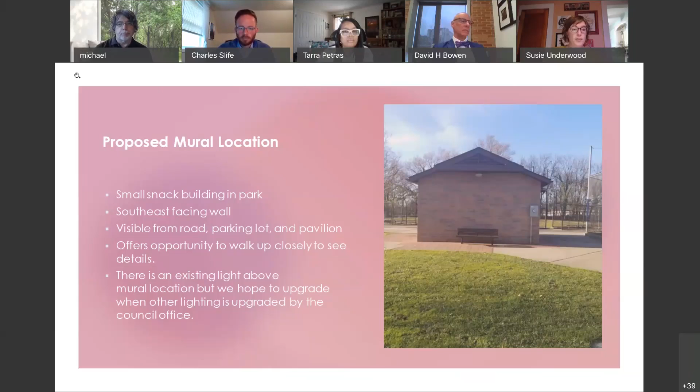You can see it when you drive by, and it also faces the rest of the park. So it's really the perfect location to see it from almost any direction that you would be in the park or around the park. You can progress the slide.

So the theme is celebration. The idea is that we wanted to really celebrate all the different cultural heritage of the neighborhood, and through the theme of celebration, how do different people celebrate? How do different cultures celebrate? And we got a lot of answers from the neighborhood for that.

And so the content for the middle of the mural is from the answers we got from community members, from residents around the different cultural celebrations.

And so the mural is actually called Our Neighborhood Celebrates, Nuestro Barrio Celebra. That's Angelica's name for it. And I think Celebramos will probably be what we call the celebration that we're hoping to have in June if we can get a permit, but sometime this summer for the community.

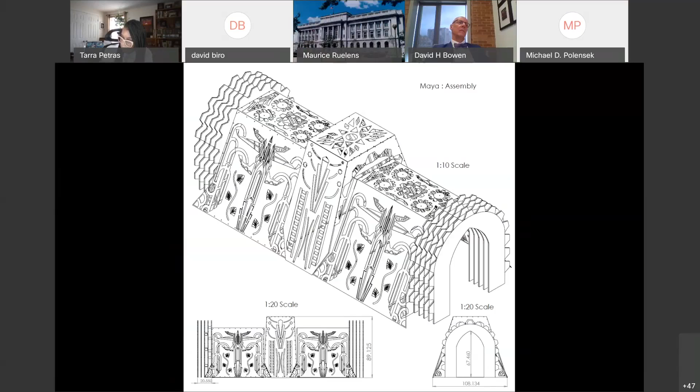Safety is a key focus here. Before we put this out on public display, we would add additional steel members to bring additional strength and raise the safety factor.

It's painted with DuPont Centari automotive finish — took about 3 gallons of actual car paint to paint it. The installation weighs about 2,500 to 3,000 pounds and will be temporarily mounted into the ground with stakes, so there's no fear of it blowing away.

Next slide, please. There's a top-down view with measurements in inches. The theme of this installation is a conglomeration, a collision between Art Deco and industrial design, with a bit of a Mayan religious, temple-like feel. That's mostly because Cleveland is very industrial in nature, with a lot of Art Deco, Roaring '20s design in and around the city — it's the collision between the two.

If we could go back to the previous slide, and then to the key shot rendering — what you see here is it rendered as if up on the hill at Carnegie and Ontario. This is KeyShot, a hyper-realistic rendering program that I use for all my design work. It's really handy for visualizing what an installation would look like at places around the city, or wherever I'd like to place them.

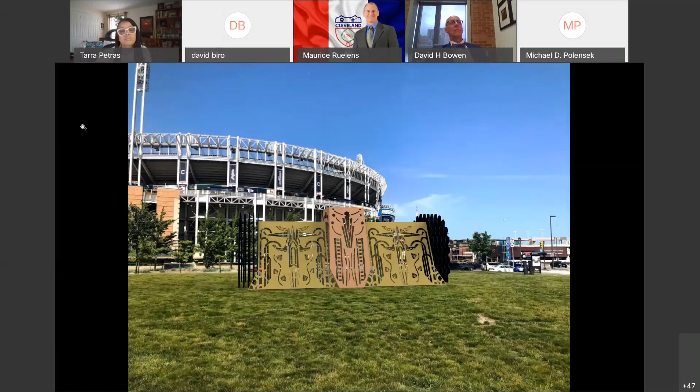And that's what it would look like from the front if you're standing in front of it. The entrances and exits actually have a decorative painting pattern on it that my friend did. It's not rendered here in KeyShot; she did it post design. And you could see what it will look like sitting up on the hill.

And this is at the location of Carnegie and Ontario, obviously. So, next slide.

It's really beautiful. Kirtland Park could serve as a great location for a gallery of large-scale public art, in my opinion. This pad here is really nice and expansive. There's actually an electrical box hookup next to it, but the electrical is missing — the city must have taken it out at some point. Can we go to the next slide, please?

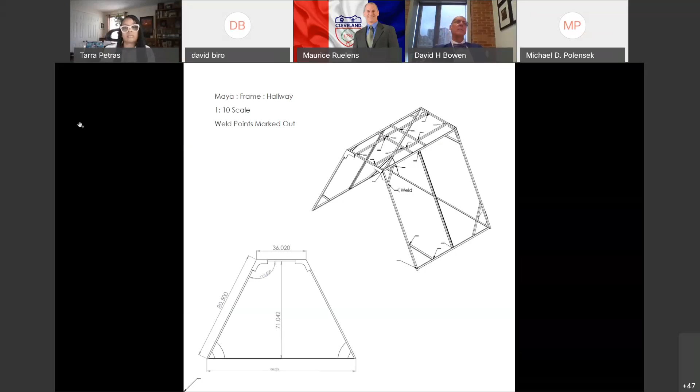I believe that people do stop and check out public art when they see something new, whether it's sitting at the corner of Carnegie and Ontario, or at a public park or an intersection somewhere around Cleveland. I believe people will stop.

It was talked about yesterday in design review. What I've seen with my public art installations is that people do stop to inquire what the heck is going on, what is this, what's it all about, what does it entail. It's typically not stuff you see in Cleveland, in my opinion. So it's with great gratitude to be able to bring a project like this and put it on display on public property.

Due to the nature of it, Maya can be orientated into a different direction on the pad. It probably can't be situated the other way, but it can be put at an angle. And then there would, once again, be solar lights around the installation pointing in.

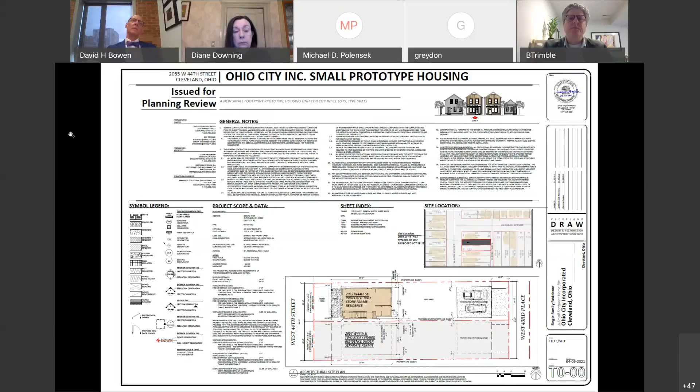We show that in relation to the neighboring houses to the north and the south. The north and south houses to our proposed lots are a foot or less than a foot away from the property line, which is pretty typical of this neighborhood and this block area.

If you wouldn't mind advancing the next slide, please. These are context photos showing the great mix of old and new infill houses on the street. We have mostly gable front, 1.5-story and 2-story houses, similar to what we're proposing, in relative closeness to one another.

Where there isn't a house, there was some previous lot split or a former house that has been demoed and is awaiting new construction. But the tightness, the closeness to the street, is prevalent not only on West 44th, but on Orchard and the street behind us. If you wouldn't mind advancing to the next slide, please.

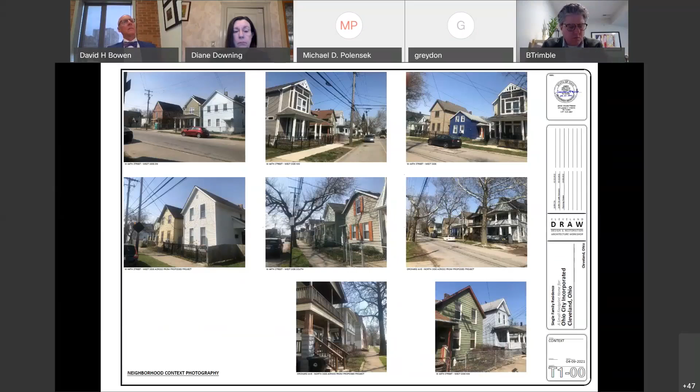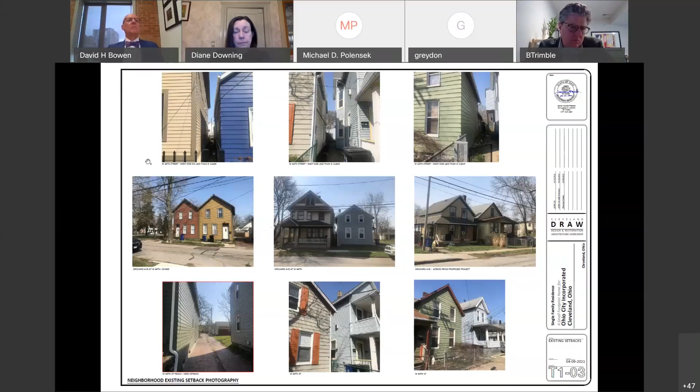The next 2 slides are just a quick excerpt from the protracted CD set, showing that we are really making small, affordable homes appropriate to the neighborhood. We're really trying to get new housing into this neighborhood.

You're fading in and out. We can't hear you, I'm sorry. I'm actually in the car on a road trip.

Just to show that these are affordable houses that we're really trying to make market rate at a price point that most people can afford. So 2-bedroom, 1.5 bath, but with good open spaces that have really been pushed to the 17-foot limit to maintain marketability, with some projections to 18 feet. And it's those projections of the stair to create the space upstairs that limits us down to 3 feet. Otherwise, we would be 5 feet, which we are at the street and the rear of the property.

And the last slide that you see is the front elevation that really shows the character of the new construction. For this, we've done several designs that we've worked through with the city and review committees, but this one seemed to fit the best with the context of the neighborhood. So that is what we would like to present to the commission, and I will turn it back to Ben for any further comments or questions.

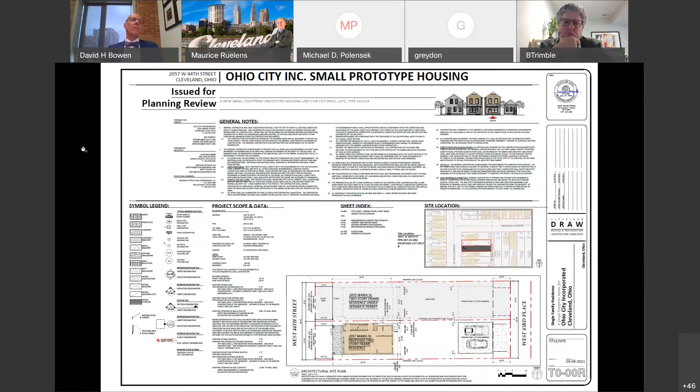Thank you. Commission members? I just want to say I appreciate your thoroughness. This helps define what you're trying to achieve. I do have a question: you're here for a lot split, I get it. Once that's done, you have to go then ask for permission for variances. So I need to understand what we're approving and what it means as you guys move forward.

Go ahead, Ben. So yes, we have already had this design approved by the Housing Design Review Committee internally at the city, not only because it's a land bank lot being provided to us, but also to approve the design. So after this, we would proceed to a variance. I don't believe that under 4 units proceeds to the commission, but maybe one of the planners could correct me. So I believe after this, we would proceed to variance and then to building review.

It would go to BZA, correct? Thank you, that's correct. I just have a procedural question, and again maybe this is food for thought. So you've gone through design, you're asking for a lot split, then you proceed for variances based upon setbacks, etc. What if they're not approved and they ask you to change your design? Seems like the working drawings are done. I'm just trying to understand how we got this far, and now you're asking. Hopefully you're crossing your fingers.

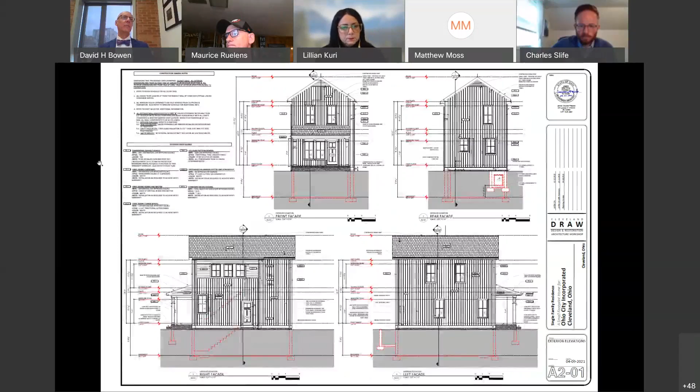Michael, call the roll, please. Bowen, yes. Downing, yes. Fluker, yes. Kuri, yes. Paul, yes. Slife, yes. Motion carries. Good luck, Ben. Thank you all very much. Thank you.

The next item is lot consolidation, lot split for permanent parcel numbers 004-01-038, 037, 066, and 067, located at 2041 through 2035 West 20th Street, and 2060 West 20th Place. Who's here for this?

Hi, this is Haley Novak from Horton Harbor. Can you all hear me all right? Yes, loud and clear. Okay, great. Thank you, Mr. Chair and members and staff.

As you mentioned, this lot split would involve quite a few parcels. We have some existing site images here. The parcels are located along West 20th Place, which is accessed off of Smith Court and is just to the east of West 20th Street.

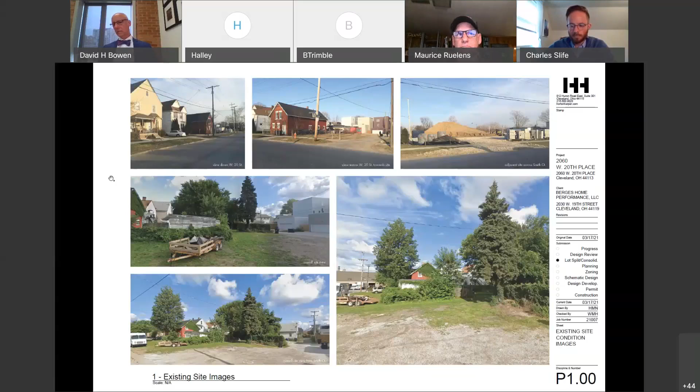The images here on the top row are views from West 20th Street, looking down Smith Court, and then the three larger images at the bottom are of the site itself, which are off of 20th Place, the smaller alley. It's a very narrow street. If you wouldn't mind going to the next slide.

This image here takes a look at the different parcels involved. Again, we're on West 20th Place, and the main parcel in question is 2060 West 20th, parcel number 067. The house just to the north of that is existing and will remain, and we are not touching that parcel. The parcels highlighted with a darker property line are all owned by the same developer.

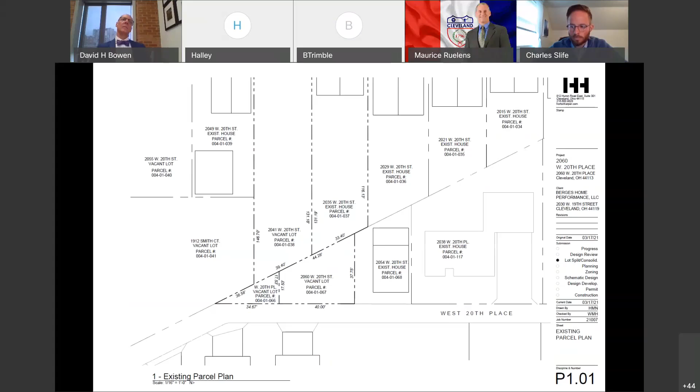The intention is to use 2060 to add a single family house. We would be taking portions of the parcels to the west and the triangular parcel to the south. If you go to the next slide, we'll have a better look at what that new lot would look like.

So just over 50 feet wide and 65 feet in depth. Again, we're taking from the parcels around it. This is similar to a lot split that was approved about a year and a half ago, I believe.

Just to the north, you can see 2038 West 20th Place. And there's a similar house not shown here, to the north of that, which also went through a lot split to be able to consolidate for a single family house.

If you go to the next slide, you'll get a better idea of what that site plan would look like. On 2060 West 20th Place, we are proposing a single family house. It would be set back quite a bit from the alley in order to have a larger setback and provide a driveway to an attached garage.

If you guys have any questions, I guess I'll open that up for you now. Commission members?

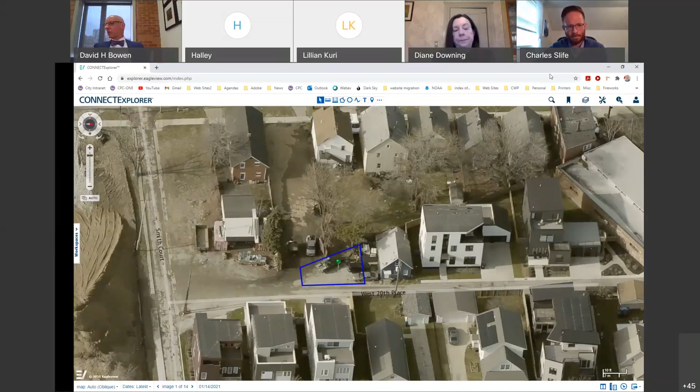So a motion to table. I'll second. Downing, okay, we have a motion to table. Let's make it a date certain, the next planning commission meeting. Is that okay? Unless the applicant can't get it back to us in time. I'm fine with that. Date certain, okay. That's fine with us as well. Second. Thank you for the further discussion.

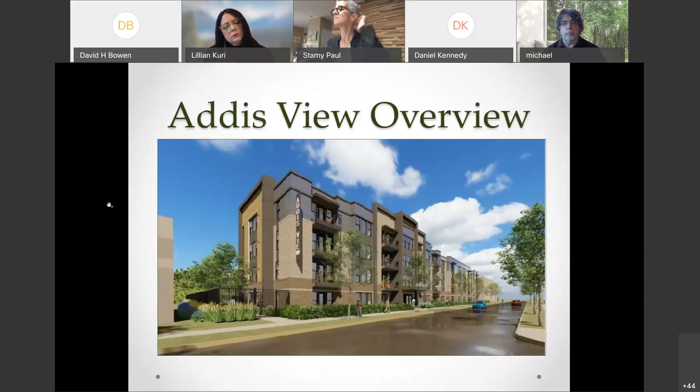The next slide is a rendering looking north of phase 1 of what these might look like. If you want to go to the next slide. So in phase 1, it'll be 131 multifamily residential units, a 4-story development, 69 surface parking spots, some bike spaces, balcony features, and a courtyard for residents.

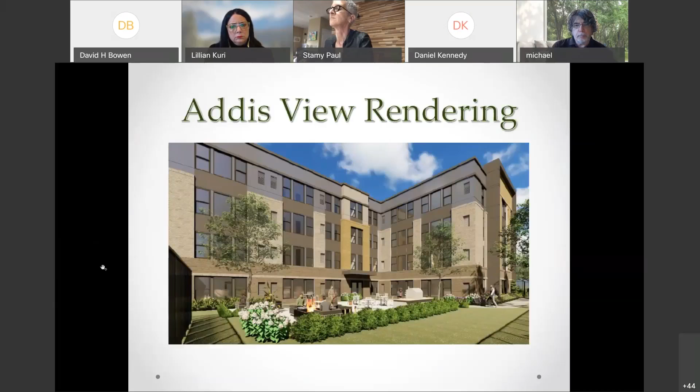The next slide will show the rendering of that green space or courtyard for the residents. And then following that is an aerial overview, as well as what the facade would look like from East 90th. The top picture is showing phase 1 and phase 2 of what that'll look like.

If you go to the next slide, we have our 2020 citywide plan. You can see that the majority of it is in a multifamily planned area. There's some mixed use. The light pink on the bottom left is institutional. There is a church down there, so that's what that signifies.

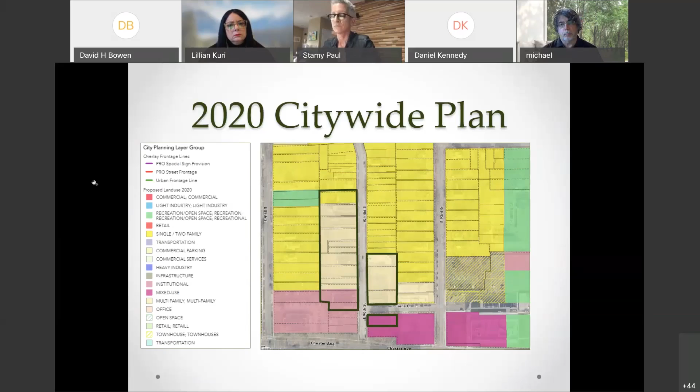And the process, the last slide, is that economic development is offering a 30-year non-school TIF. Per the Ohio Revised Code, we need to enter into a chain of title in order to adopt the TIF. And this project has been presented to design review in the past.

Okay, thank you. Commission members, questions? I move approval, Downing. Second, Paul. Motion and a second. Can you call the roll? Downing, yes. Fluker, yes. Kuri, yes. Paul, yes. Slife, yes. Motion carries. Thank you.

Mr. Chairman, we are going to postpone this particular piece, Director Collier. Yeah, that's 228-2021 being postponed. So we'll move on to the next one.

Ordinance number 230-2021. This is authorizing the Commissioner of Purchasing and Supply to sell city-owned property not needed for public use, 5470 Lake Court, to SCN Services LLC. Suzanne, are you doing this one?

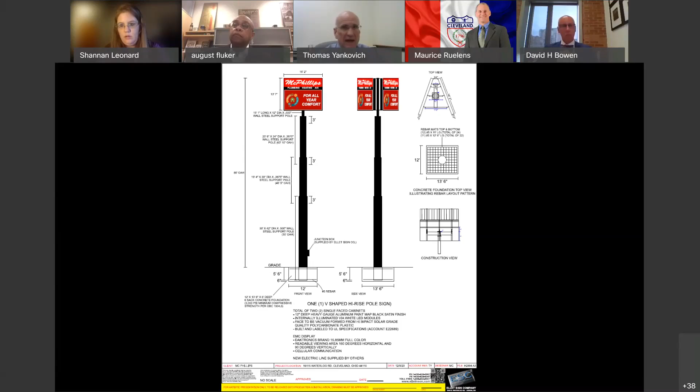So that is also why we have -- you're not a WebEx meeting expert, but okay, I have this meeting on. Please, excuse me, please mute your microphone.

So that V-shaped design actually serves as a deterrent from any light coming back to the residential area. If you could go to the next slide, please.

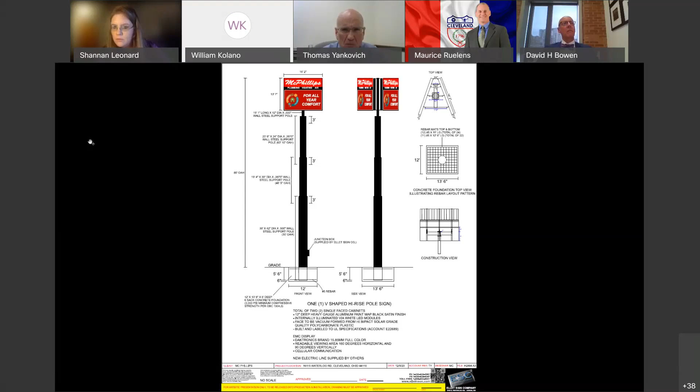We're positioning that sign on the east side of the property. The edge of the sign to the right of way to the south is approximately 25 feet. The edge of the sign to the right of way on the east, even with the V-shape, is approximately 25 feet. And if you go towards Burbank Court, it's about 60 feet from there.

If you go to the next slide, this shows the light levels on a pure dark night. So the light levels are equivalent to probably the moonlight, if that. But again, the four lamp structures of the roadway lights also spill over to that area, so the ambient light will not make this sign a bright beacon. It also has automatic dimming technology, which keeps light levels to a minimum at night. Next slide, please.

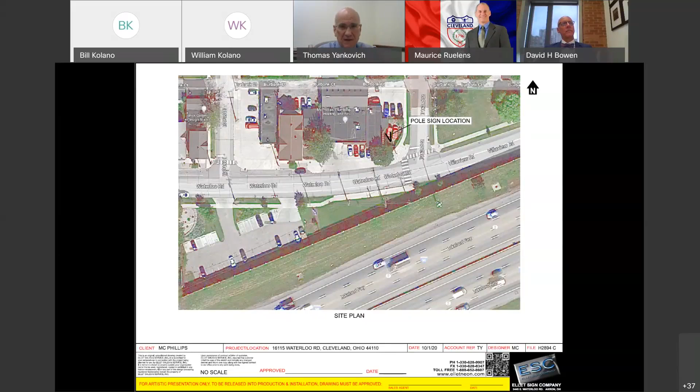Plus, of course, plumbing needs that folks maybe aren't aware of in that neighborhood. The other thing is we had drone footage showing that at the 70-foot and 75-foot levels, folks especially going westbound in the closest lane would be able to see the sign easily without the wall hindering their visibility. We looked at maybe lowering the sign, but that puts any illumination closer to folks on the ground, and the wall could still hinder visibility. We thought the height and size really worked for this area.

The other thing I would say is we went around to all the adjacent residents with our proposal, and we actually have signed approvals from all the adjacent property owners that they don't mind this project. They approve of what we're trying to do here. We really think this could be a good investment for this property and this community as a whole, because it's expensive, but in terms of advertising over the long term, this is a very good investment for the customer. We could also put up notices, Amber Alerts, and other community notices that could help this neighborhood as a whole.

All right, Mr. Chairman, we do have Councilman Slife with his hand raised for a while now. Sorry, Councilman. I do see Councilman Polensek is on. I don't know if we want to go to him first. Hey, Mike, do you want to speak first or after Shannon? It's up to you. You are muted, Councilman. Can you hear me now? Yes, I can hear you. I can speak after Shannon.

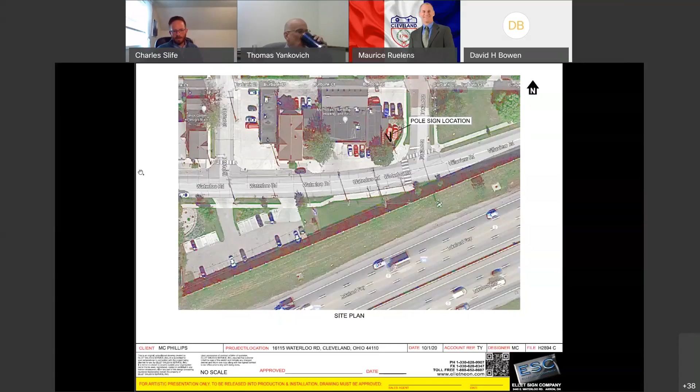Shannon Leonard, City Planning. As the applicant stated, they are replacing this existing business identification sign with an 80-foot tall above grade and 6 feet below grade, 219 square foot double face pole sign with an electronic message center, also known as an automatic changeable copy sign. The zoning at this location is local retail business, in a pedestrian retail overlay district. The real purpose of this sign is that there's a 30-foot brick sound barrier that prohibits them from advertising their heating and plumbing services at the I-90 corridor. This is the location here, near the end of the PRO. However, to the east it's two-family residential, to the north, and I-90 to the south. The red rectangle in the lower left corner is actually a legally existing billboard by Lamar.

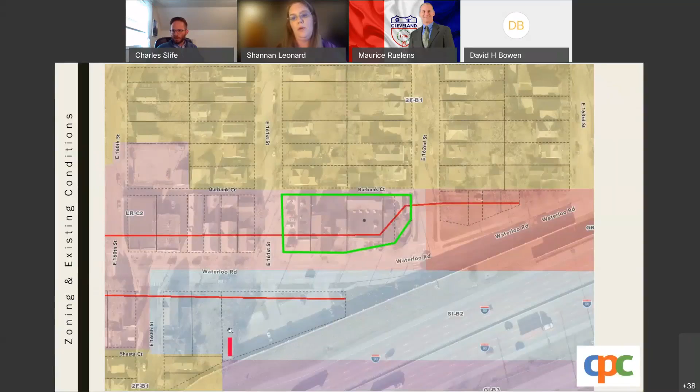It's within 183 feet of where this sign is being proposed. Next slide, please. And so this is really giving you some context of where McPhillips is.

Next slide, please. So why is this before you?

Well, because Chapter 350 allows the Planning Commission or Landmarks Commission for properties that are in design review or landmarks districts to vary the sign code based on a strict set of parameters. And this was the real intent of this was to get really good signage that matches the design compatibility of our neighborhoods and our shopping districts.

And so the requirements here are you may only vary such variation if it will result in signage that is better suited to the design of the subject property or nearby properties.

It is following Planning Commission guidelines in terms of design and aesthetics. And it's also minimum variation, meaning any variation shall be the minimum necessary to ensure design compatibility.

As you know, generally variances go through Board of Zoning Appeals, which requires a public hearing in which all neighboring residences are notified as well as businesses so they can weigh in on the matter, unlike City Planning Commission.

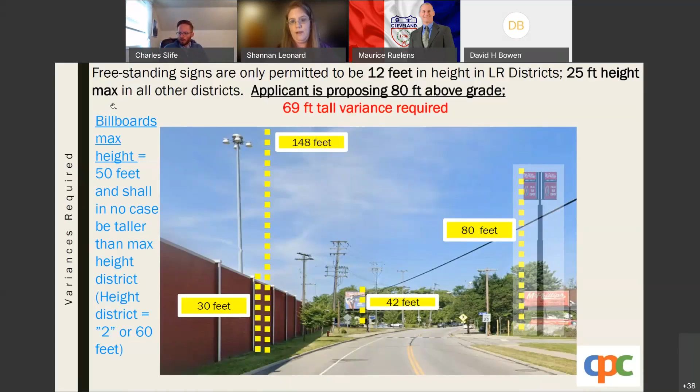Next slide, please. This is just to give you some context of what it looks like to the northwest as well as to the northeast. To the northwest, you can see the Waterloo PRO and where this 80-foot tall sign would go, which is 50 feet above the sound barrier. To the northeast, even though this is the end of the PRO, it is all residential up until you get closer to East 185th and 200th Street. So again, a 69-foot tall variance is required.

Next slide, please. The third variance they need is for automatic changeable copy. This would be required regardless of whether they were in a PRO or not—for local retail it automatically requires a variance. Some things you must consider: the proposed sign will not adversely impact the character of nearby properties, it will not cause disturbances to those properties, design and placement is approved by you all, and each display of information is static or fixed for a minimum of 20 seconds, prohibiting flashing, scrolling, animated, or other effects that give animation, or more frequent displays can occur without disturbing nearby properties. Again, that would be your decision.

The councilman, as well as design review, talked about how it might be nice—or even the applicant suggested—that we allow public and community messaging. Unfortunately, that is an off-premise context, and we really can't regulate that. It becomes a content matter. So if the councilman would like them to have some type of community message, like 'welcome to Waterloo,' that's something he would have to work out in the council legislative process. City planning really can't discuss that.

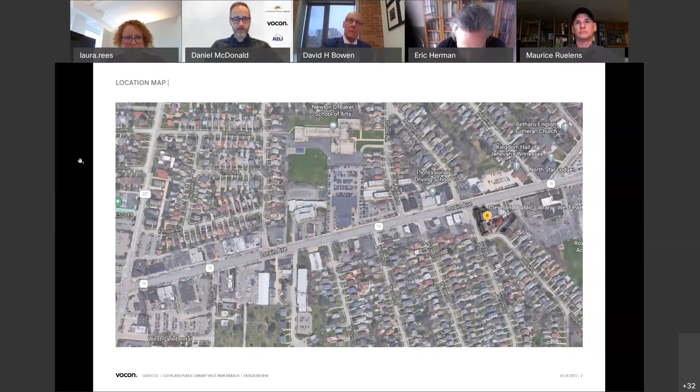So this first slide here, this is our location map. We are the Cleveland Public Library West Park Branch location. We are here at Triskett and just down the street from Kamm's Corners, just to orient everyone to our exact location.

If we go to the next slide, please. This is the site plan as existing. Lorain Avenue is to the north. The existing library presents this very long, elegant facade to West 157th Street. And then the new addition that was put on in the 70s addresses the parking lot that was also added in the 70s and orients itself back towards Silsby Road and the residential neighborhood.

We are up very close next to the existing fire station. And on the east side of the property, a fence separates us from the Cleveland Clinic property, from that parking area there. The existing accessible entry is located at the south entrance, the 1970s addition entrance facing the parking lot, and that is currently the only way in and out of the building.

Next slide, please. So these are the existing exterior views. The first view on the left is from Lorain Avenue. It's a lovely elevation, but it is very much a secondary elevation compared to the elevation you see on the right, which is along 157th. So this is clearly a neighborhood-focused building.

It's a very beautiful building, Tudor Revival. It's sort of on a heroic residential scale. It is rightfully recognized and beloved by the community. It is something that was built for them and that they have cherished consistently for over 100 years. And we spent a lot of time talking to library patrons, reviewing previous community engagement surveys and results in meetings, and just really trying to listen and respond and understand how people felt about this building and what place it played in their lives.

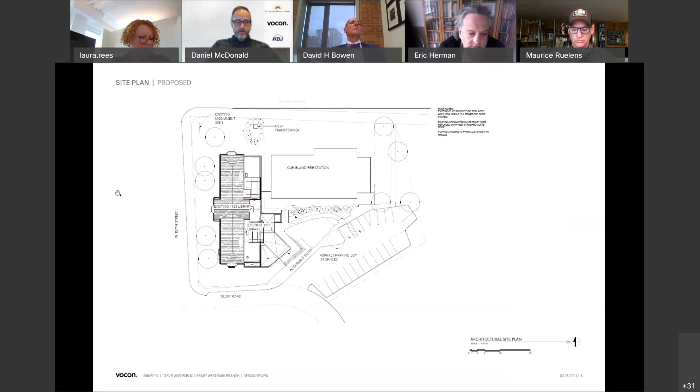So it's a very gentle, very efficient, very elegant solution, and will also be much more attractive and easy to maintain than what the library has currently. So we can go to the next slide, please.

Here's a slightly more clear, impressionistic rendered version of those landscape changes. We have already spoken to Near West Design Review, and they have requested some additional trees along the north, south, and east sides of the building. They've also asked us to examine our tree species choices to include species that are more considered to be legacy trees, longer lived, slower growing, larger shade trees. We are happy to incorporate those suggestions, and you will be seeing those revisions in later presentations as we progress.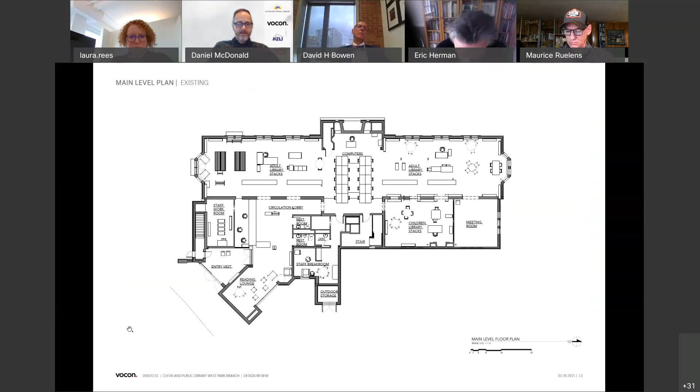You take a breath too.

So on the main level, there's the open stair in the middle. You can see where we are hopefully someday making that 157 entrance a main entrance again. The adult library stacks, that's an existing area covered with a drop ceiling — we're opening that up to the original vaulted ceiling. And then the green and purple areas to the east of the plan — you'll forgive us, for reasons of presentation, this is oriented 90 degrees from true north.

We are turning the 70s addition and the lower part of the original building into community and circulation areas. We have various meeting rooms, community rooms, all sorts of services that the community has indicated are desired and important to them through our various conversations with them.

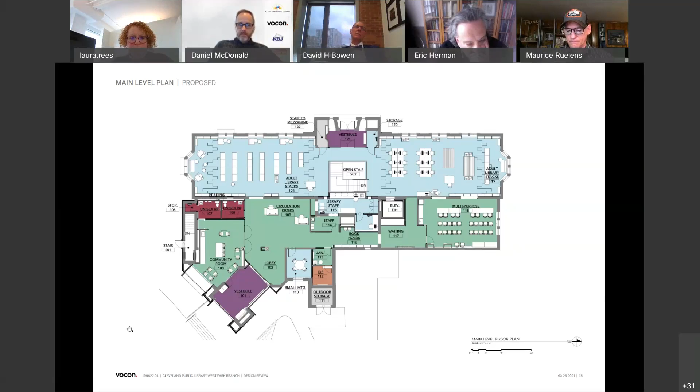I believe, for the next slide, that ends our presentation. It does not — we have, I always forget that these hardline elevations are in here.

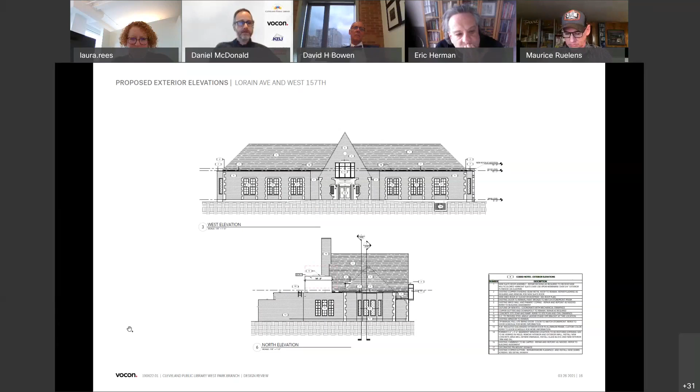This is just a brief, slightly more technical summary of the exterior moves, which we've already talked about looking at the renderings. That continues on to the next slide.

There's our new trespa at the elevation, and now I believe we are done if we click through to the next slide. Thank you all very much.

Commission members? I'll move approval, but I just want to say, as the local council member, well, I guess I should hold off on the motion. I can make it eventually, but I do want to give others the opportunity to speak. But I guess I'm incredibly enthusiastic about this project.

This is, I understand, the #1 Cleveland Public Library branch in circulation, so it's heavily used, much beloved by the neighborhood. Just a little historical context — this was the original West Park Village Hall. And we all know West Park was annexed by Cleveland in the 20s so that we could all have lower streetcar fares. So that's going real good for all of us. But it's a beautiful, historic, much loved building.

And I want to congratulate Mr. McDonald for his PR spin, because when it comes to that 1977 extension, he's very politely said that it doesn't really align with the rest of the structure. But within the interior, there's also plans to get rid of some drop ceilings to really celebrate the space as it currently exists. And the library, to its credit, has also been working closely with the neighborhood on shared parking agreements.

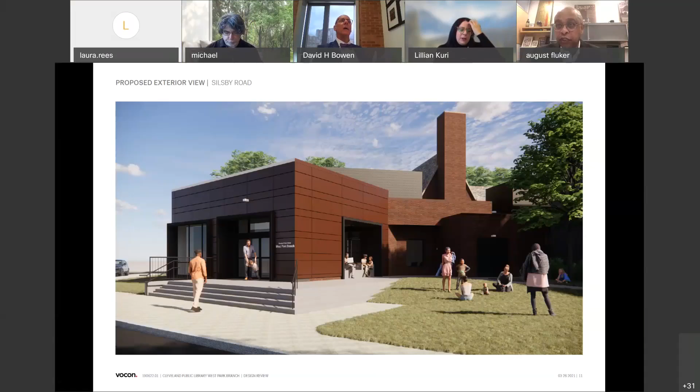May I request that the forthcoming applicants provide a brief overview so we can get through this, because I fear we're going to start losing members. Well, you're going to lose me on this one. Lillian's going to have to take over. I was just going to say it's the Dunkin' Donuts retail store, new construction, and Lillian, I'm leaving, so you're going to have to take over.

Okay, how many items do we have, David, still? We have this, do you know? Oh, we have quite a few. What I would suggest, Lillian, is after the Dunkin' Donuts there's a whole bunch of demolitions. Go to the other design reviews and then go back to the demolitions.

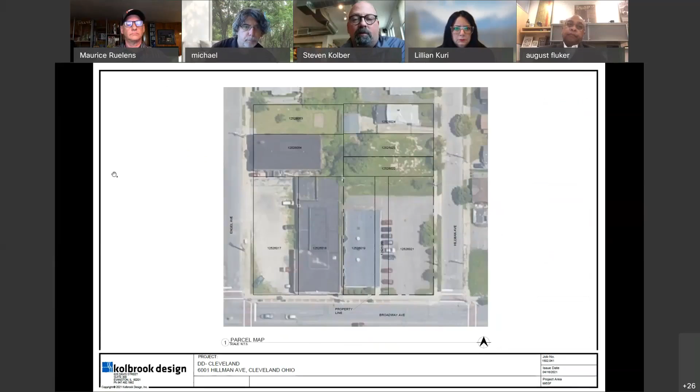Next slide please. So you can see the property lines here of what's existing, and the furthest north property within the dark dashed line is something he's acquiring for our project. That's a city-owned property from what I understand, so he's in the process of going through that to purchase it.

Next slide please. Here's our site plan. This is typical for what Dunkin' is doing now nationally for a drive-through only offering, which is what we wanted initially. But after speaking with staff and representatives from Slavic Village, we added a walk-up window at the front end and a patio, which wasn't part of the original offering. It consists overall of a double drive-through with two windows to service clients quickly, and a bypass lane that wraps around the entire facility.

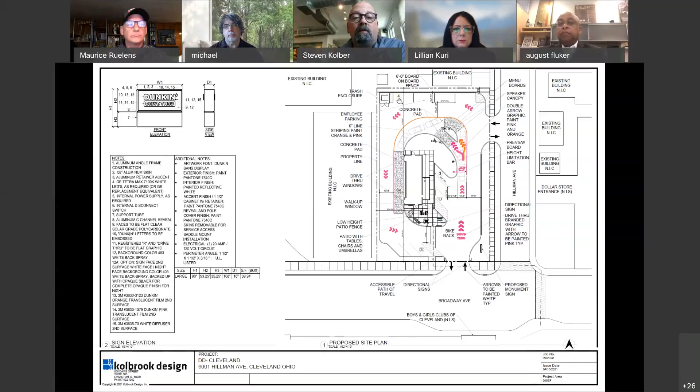And then the next few slides are just the typical exterior elevations for this Dunkin' element. We added a few things per plan commission. This is the rear elevation, the north elevation, with the window at the POS, point of sale, at the first window.

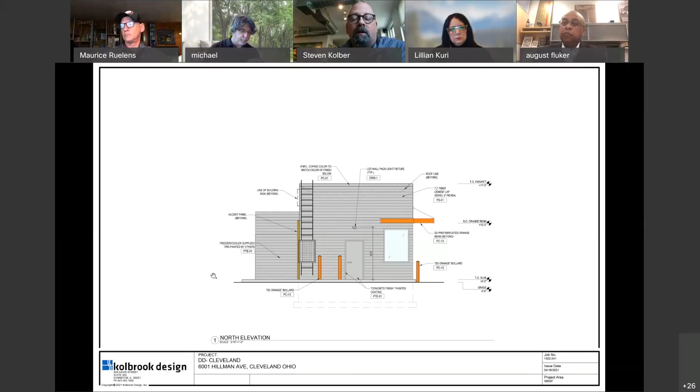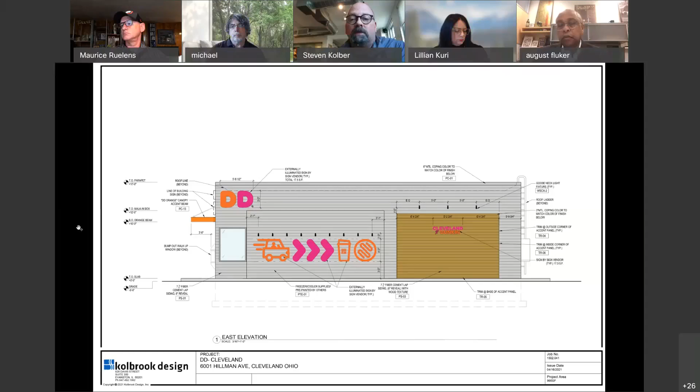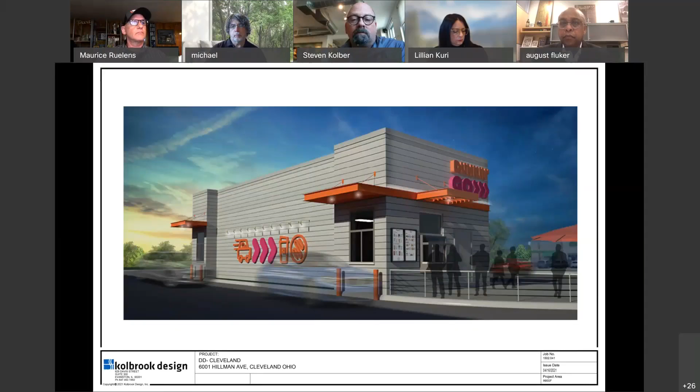And a rendering of the facility. And I think there's some exterior signage, and there we go. And the next slide is just a typical floor plan. It's very sparse, just really an operational Dunkin' without the dining room.

Okay, I don't think we need the interior. Commission members? Madam Chair, we have August.

Yeah, I would like to advocate that you guys, the owner, developer, Dunkin', do something more permanent at the crosswalk than paint. Because there's a confluence of traffic, cars, and people trying to cross to that cross-through. If it's a more permanent material, whether it's stamped concrete or something that complements or picks up the material in the patio, so it feels like it's part of that patio, so people actually acknowledge it and slow down.

Yep, absolutely. And as a matter of fact, what we just instituted in a couple other projects were, as you can imagine, with the way things are in the world, a lot of the Dunkin's we're doing are drive-through only, because those are the ones that have been really successful. And we've been doing a modified, mountable curb, where it's a little bit of a raise in concrete that gives exactly what you're looking for. We're more than happy to do that here too.

Okay. Anyone else? And then we'll add that to the motion. August, you want to make a motion then? We have Director Collier with his hand raised, Madam Chair.

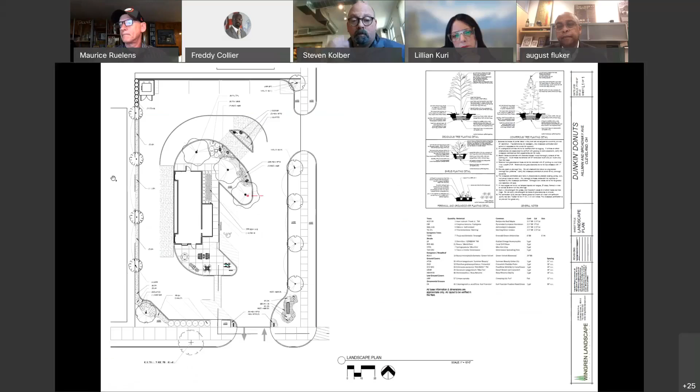Yeah, if we can see the site plan, if we can go back to the site plan, please. The reason why we didn't do that is if you see those 3 parking spots up front, those are the spots where you just ordered the 12 boxes of joe and 32 dozen donuts. That's why they say pull up there and we're going to take care of you.

And we preferred, or at least the brand prefers, the drive-through where the curb cut is now, only for the fact that it's usually 10 cars is the max that we like to see. But if it's a busy day for whatever reason, we're allowing for a straight shot for cars in the queue, and then the cars coming from the drive-through can just navigate on the way out.

Madam Chair, we also have Shannan Leonard with her hand raised. Plus, Director, you'd need 2 curb cuts, which I don't think would be ideal either. Right, we're trying to maintain the existing ones there. More existing curb cut would be better.

All right, Shannon, and then let's get a motion. Maybe she doesn't, Maurice. She just raised her hand. Shannon? You hear me? Yes.

I apologize. I'm not sure exactly what level of approval this is, but the applicant has been made aware that there is a 43-foot specific map setback from the center line. That parking on the south side facing Broadway is within that setback, and BZA is limited. There are specific landscaping requirements the applicant will need to meet for BZA to have the ability to grant that variance for parking to be permitted into that encroachment. Just so you all are aware.

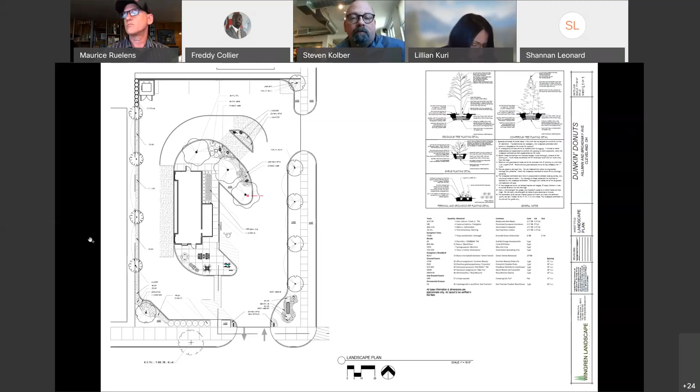Okay, and that was made clear to us as well. But to have those pull-up spots are really crucial. So we're looking to go through that process and satisfy the requirements of BZA accordingly. Okay, perfect. All right.

We have a motion. Move to approve project as presented with the caveat that the applicant and developer integrate a permanent material in the crosswalk that ties into the plaza area for pedestrians. I'll second, Paul. Motion and second. Can you call the roll?

Downing, I think she's still not here. Okay, Fluker. Yes. Kuri. Yes. Paul. Yes. Slife. Yes. Motion carries.

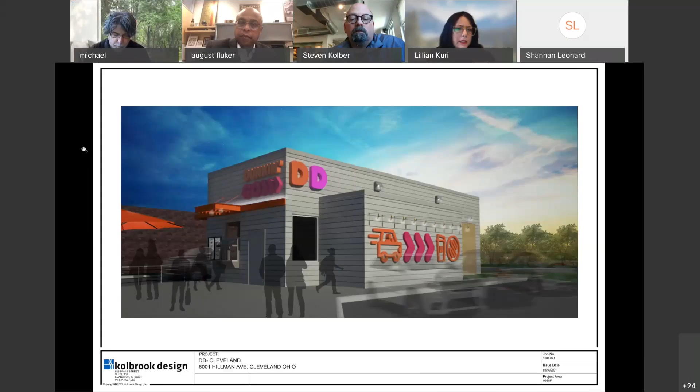All right, next item, we're going to stay on design review. So if we could do the demolitions last, that would be great.

Keep going. Hold on, having some technical difficulties. We heard that. By the way, that's on the record. That would be on the record and taped. Okay.

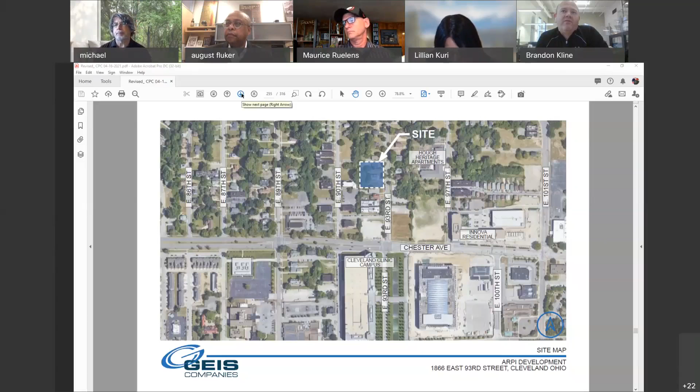The project is located on Chester and East 93rd, a quarter of a block inset off of Chester, to the north of the Cleveland Clinic campus.

Some context of the area: as you leave the institutional gateway of the clinic and into a more residential street along 93rd, there are a couple of small apartment buildings as you enter that street, and then two residential properties.

Contextually, there's Innova Residential on the corner of Chester, one block over, Heritage Apartments as well, one street over, and then some nicer, 2.5-story, 3-story houses on the street as well.

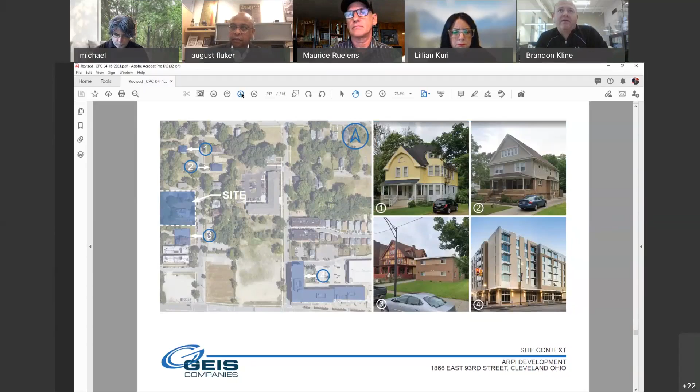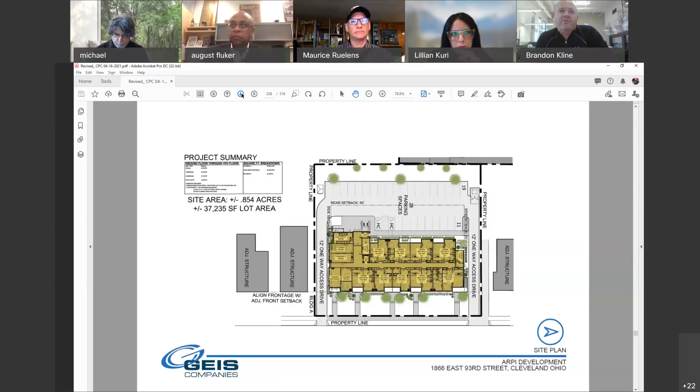The project entails 2 one-way access drives into the 4-parcel site, which will be lot consolidated. 3 of the site parcels are currently controlled by the developer. The 4th is a land bank parcel that is conditionally approved on the condition that final planning approval moves forward. It's a 4-story, 42-unit building.

There's hope that could be an additional 118 units, part of the same development with connection. The land is again a 4-story building, 42 units, with some small amenities for a building of that size.

Some exterior lighting and features: wall sconces at each balcony, and every unit will have a balcony. Some wall packs on the exterior wall to provide site lighting, and there will be no light poles. One of the major elements in discussions with planning was to create a street frontage and pedestrian experience. All the units on the ground floor will be walk-up, with a stoop and 3 steps or a ramp for the step-free unit to access, maintaining that same experience along the street.

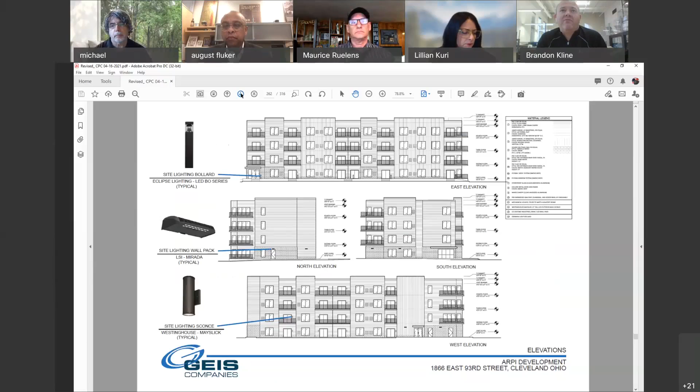Landscaping of the project includes a swale in the rear to handle stormwater retention, and then landscaping at the front to complement the existing, very mature tree-lined trees that encompass this street.

As everyone is well aware, material prices are soaring. Since we presented this project, to maintain and be able to move it forward, some concessions had to occur on the exterior, and we are going to bring back some of those elements that we pulled away. The elements agreed to were putting a more established cornice on top of the gold projections or the orange-colored copper projected areas, and holding the corner with a canopy above the 2 corner balconies along East 93rd.

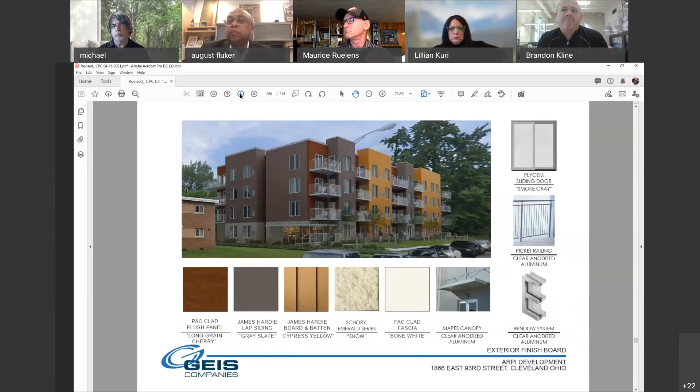These were the original renderings that we submitted and gained approval from planning and design review back in December.

And these are the accepted modifications that we agreed to establish and put back. Again, hold that corner, wrapping that corner, putting the canopy back above that balcony along East 93rd on both sides, and then a more established cornice above the color projections. That's it. Okay, thank you very much, commission members.

Commission, any other comments? A motion to approve, Paul. Second. We had a motion and a second from August. Any other discussion or comments? I just want to say thank you for the considerations and the development of the project. Appreciate that from your team. Appreciate it. Can I clarify the motion for final approval? Yes. Okay, thank you.

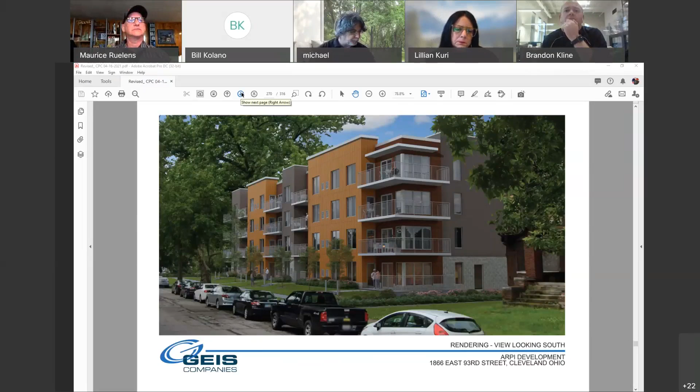Let's see, the next item is the City Club Apartments accessory installations. This is for final approval. Who's here to speak to this?

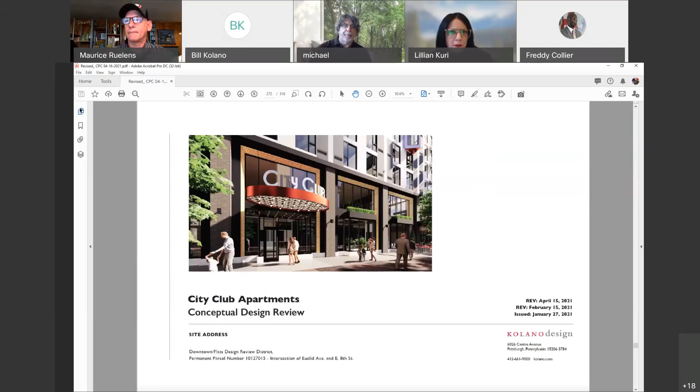Bill Kolano is here. You have a really bad echo, by the way. Yeah, a lot of feedback. Hold on, we're trying to resolve that. You might want to turn your speaker down. Anyone else who's going to speak, I'm going to swear you in. Do you swear to tell the truth, nothing but the truth, as you shall answer to the penalty of perjury? I do. Are you logged in? Are you logged in twice? Because we're getting a tremendous amount of feedback and echo every time you speak. Do not think so. We had somebody in an adjacent office logged in who we canceled. I have a William Kolano and a Bill Kolano, both logged in. It's better now, there you go. Is that better? No, nope. Hold on. Is that any better? I'm logged in twice. No. What do you think, Maurice? Go to the next one and come back when he must have to shut down and log in. That's fine. Bill, are you okay if we do that? We're just really short on time. All right, let's go to the next item.

This is the Flats design review case, Brewdog renovation, at 1956 Carter Road. Is Juliane here from Vocon? Yes, I'm here. Good morning.

Do you and anyone else who's going to speak swear to tell the truth, the whole truth, and nothing but the truth as you shall answer to the penalty of perjury? I do. Okay, go ahead. And if you could move pretty quickly through, that'd be great. I will. So this is on the Scranton Peninsula.

Brewdog is an international microbrewing, craft brewing company. They are taking - next slide, I'll show you where we are - they are going to lease the first floor of the Avian building, which if you look at Google Earth right now looks really bad shape, but the landlord totally renovated the building. They're going to be moving into the first floor and taking the rear yard to the river with an option to lease the second floor to expand. Next slide, please.

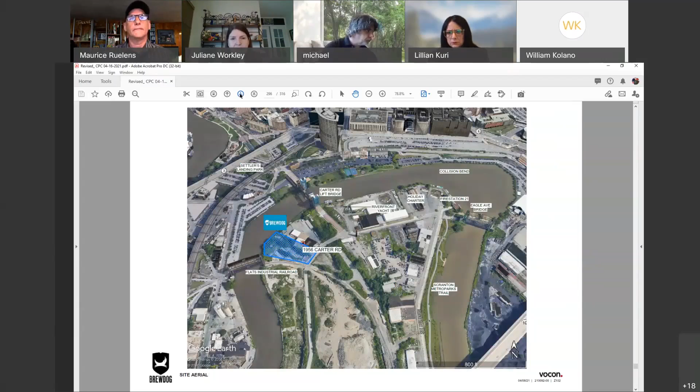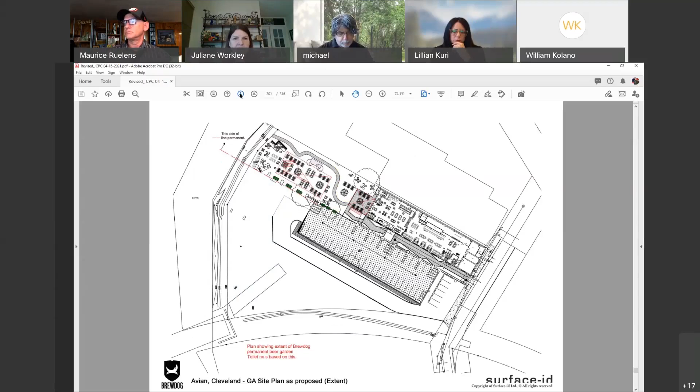So you can see this is with the temporary lease area removed - this is what's going to be constructed in the as-of-right lease area in the back of the property.

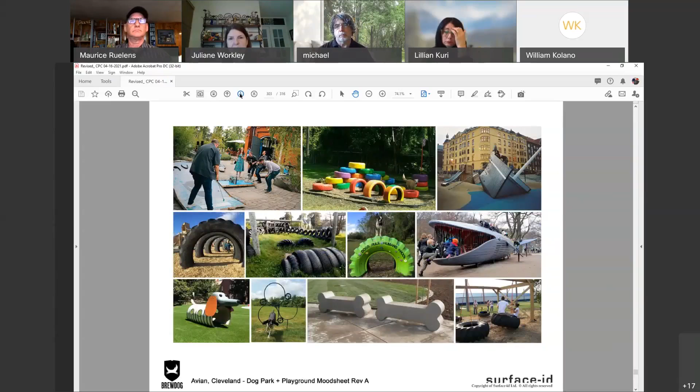These are some precedent images for the dog park and also the playground. They are probably going to purchase a prefabricated playground, or we're looking at, with the landscaping coming up, maybe some custom playground designs.

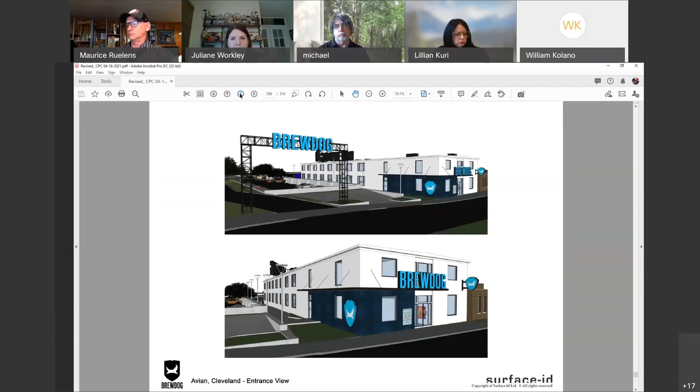I think these just show additional images of what is being proposed for the outdoor area. So in the interest of time, are there any questions regarding this project?

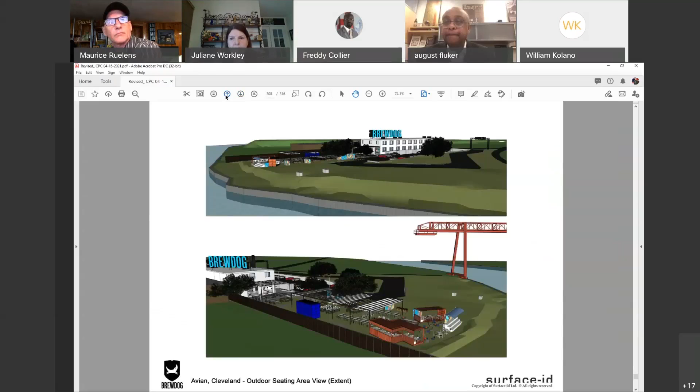I move to approve - this is conceptual, so we'll see these guys again. Okay, yeah, it's a great project. We got a motion and a second from Charles. Any other discussion? Great project, so let's call the roll.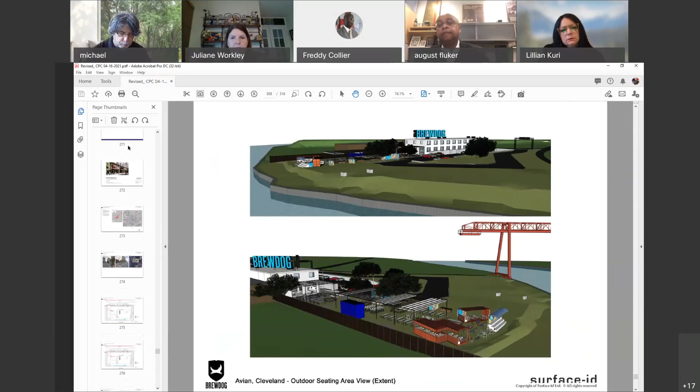Fluker, yes. Kuri, yes. Paul, yes. Slife, yes.

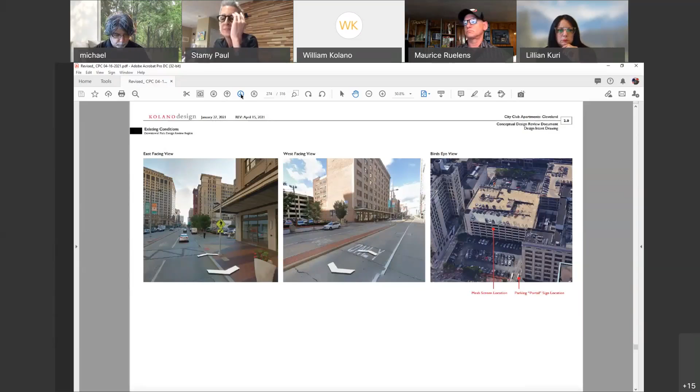Two views, looking east and looking west. We are the parking lot property. Please note in the left image, the canopy on the building that will be to the right of the City Club apartments. The 2 signs we are questioning and reviewing today are marked on the right-hand side photo. There is a mesh screen on the parking garage, and there is a portal that marks the drive to the entrance of the parking garage. Next slide.

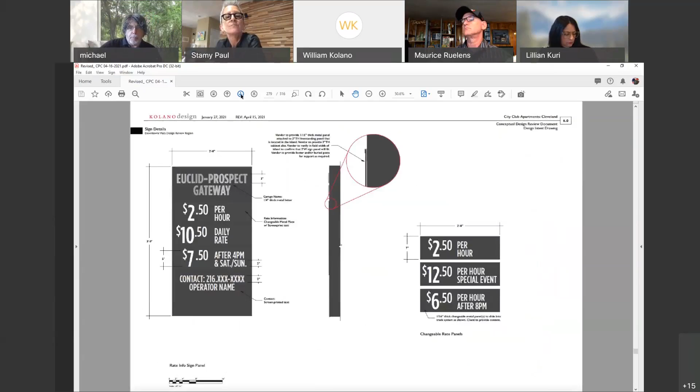This is what the portal looks like. It is illuminated internally with some graphics on it and a big P to mark the entrance. We can skip this—it's just how the portal is constructed. Yes, there are rate signs along with it. We can skip through this. If there's lighting, we can skip this. More lighting, skip.

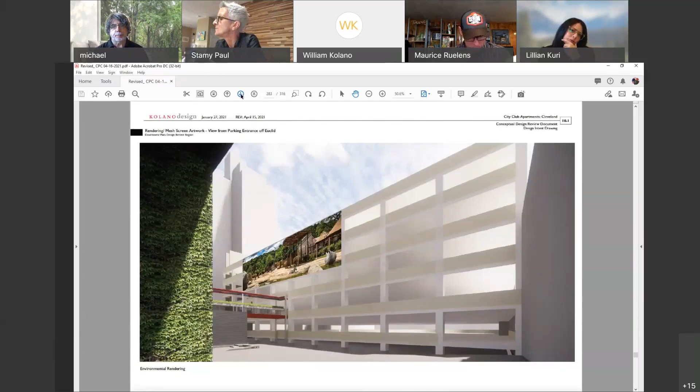This has to do with the position of the mural mesh on the garage. When we showed it to you last time, we had just shown a facade of the garage with the mural on it without context. So this is an environmental rendering showing it from the end of the parking roadway, just as it comes into view. Next.

Why the zoo image while you're there? The owners of City Club have an affinity for the zoo. They think the image will really resonate with their target market—it's a surprising, delightful, unusual view. Is it a view of our zoo or a random zoo? It was furnished by the zoo—the Cleveland Zoo. Okay.

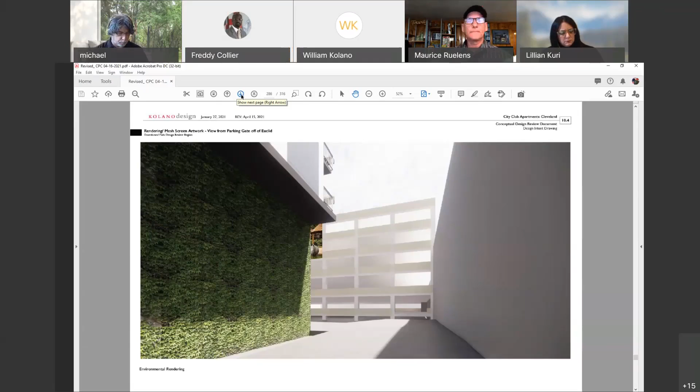Director Collier had his hand raised—just along those lines, can it be changed periodically? Can the illustration or the mesh image be changed periodically? Yes, it should last several years and is a very high performance product.

This is another view from the portal just after you drive through, and you can see from Euclid Avenue it is not even able to be seen. Next.

This detail shows the product, a mesh. The mesh blocks headlights from the garage into the apartments, and people looking out the apartments will not see into the cars in the garage. So it's really dual purpose from either side. Next.

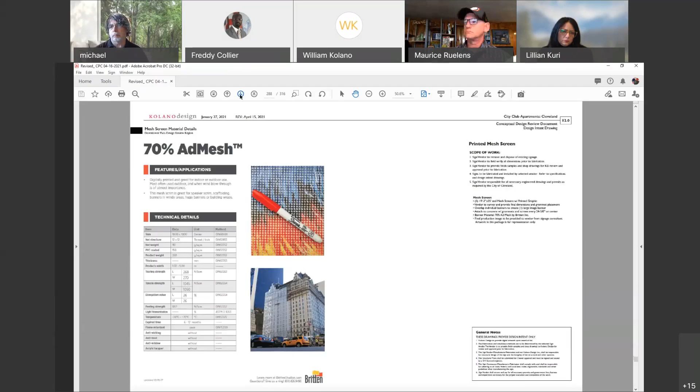This is the rendering showing the portal closer to the sidewalk, and from the other direction. We're concerned about traffic being able to see that portal driving eastbound, and that's why the forward position is preferred.

This is pushed back 5 feet. And the other view where you can see it is more recessive. We think it's important to have it pulled forward. And that's our presentation.

So show us the portal you're proposing today and the one design review reviewed, the pushed forward one. Go back 2 or 3 slides. Did design review approve the one you're showing us? Yes, they approved option 1, where it is forward, more in line with the edge of the sidewalk.

Okay, commission members, any comments? I like it, I like the greenery. I think it helps break up what otherwise could just be a big piece of metal. Any other questions or comments, commission members?

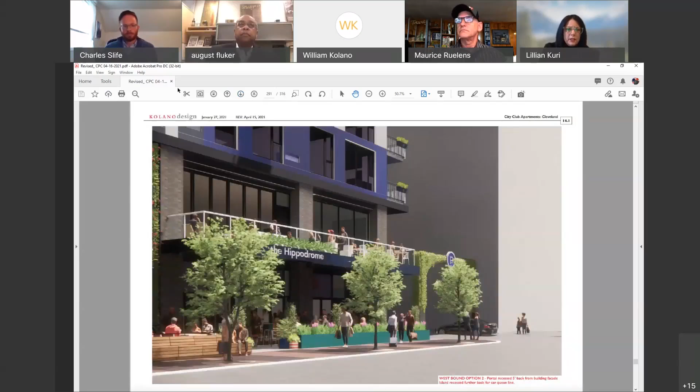I'll move approval. Second. A motion and a second. Any other commentary before we take a motion? I'll say I don't love the zoo image, but I guess it's temporary. I personally think it's slightly out of context, but I understand it. I just think there's probably more imagery that would work, but it's your choice.

So let's take the roll. Fluker, yes. Kuri, yes. Paul, yes. Slife, yes. Motion carries. We have gone through design review.

We just have the demolitions now. So if we could fly through those, go back to them. I don't think we have to swear them in because it's the city presenting. They all look in bad shape, so let's get through them pretty fast.

Thank you, I'll wait until the first page is up and I can talk fast. So I'll make this happen. If there are any that we should really pause and think about, let us know. Okay, the first one, is this it?

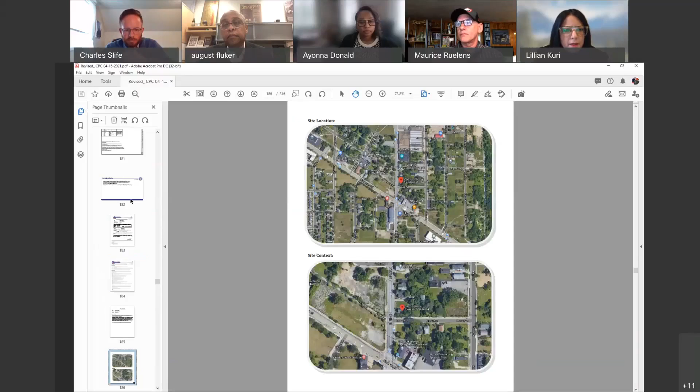Let's see, what's the address? It is 2977 East 79th Street. Yep. Sorry, trying to go faster than you could read. Yes, no, but thank you.

We're seeking approval for this property on East 79th. You can see here the site location and site context. The property is in fairly bad shape, just a wood 2-story structure. There has been no attempts to redeem this property. It's surrounded by vacant property.

I move to see the interior photos, please. I'll second. We have a motion and a second. Call the roll, please. Fluker, yes. Kuri, yes. Paul, yes. Slife, yes. Motion carries.

The next one's 7024 Grand Avenue, and I'll fly through all of these together. These are all sites that will be demolished in advance of the police headquarters off of Grand Avenue and in that general vicinity. All of them are vacant and owned by the City of Cleveland. So you can see the interior photos, the conditions. They're essentially all on the same block.

You have the next property at 7102 Grand. We're going to have to take separate motions, so either we can do them individually or go back, but we'll need separate votes. Okay, well, we can just run through the votes there.

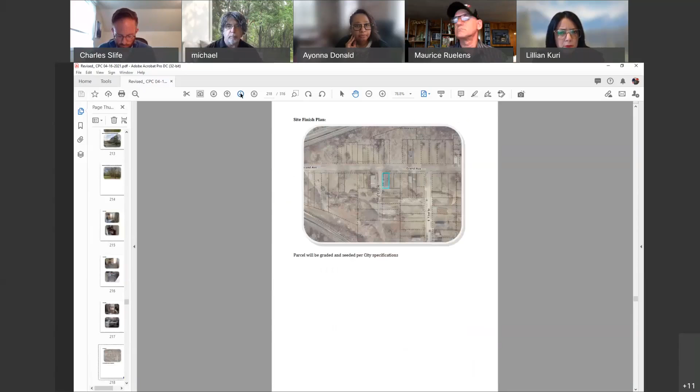Go ahead, August. I need to recuse myself. Oh yeah, well we still have a quorum. I think we're okay as long as you recuse yourself. We started with a quorum, so we should be fine. You want me to keep going through all the Grand ones together? August, will you have to recuse yourself from all of them? If they're associated with the headquarters, yes.

Okay, I actually need some counsel here. We will lose our quorum without August. Can we still vote? David is on his way back on. I did indicate to him, yes, so he's on his way back. Okay, that would be good. Are there any others besides these, or are they the last few? These are the last from me. Okay, so let's hold on, hopefully David can come on in a second so we can get these approved.

So go back to the first one here at the police station, we'll take them one at a time. And even though, I understand, and that's thoughtful to recuse, but these still are just properties that are in disrepair, vacant, abandoned, and a nuisance that are owned by the city. Just mentioning that the future development of this land is the police headquarters, not that this is necessarily technically a part of it, they are tangential to the project, right?

Is there any other information you'd like to know about those, or are we just going to wait for Mr. Bowen? I think we have to wait. I think he's coming on now. He's coming. I think August needs to recuse himself because he's working on the police station project, so he can't vote.

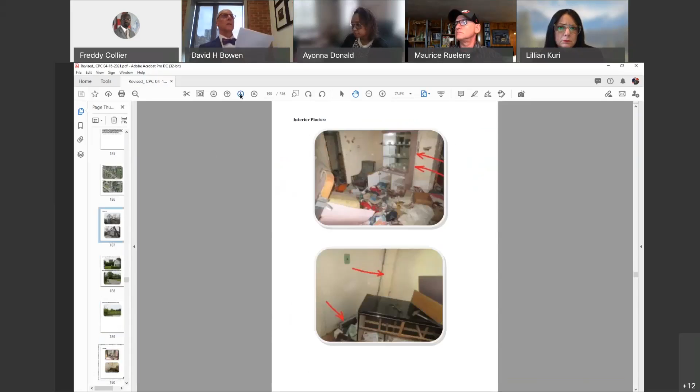The first one's 2977 East 79th Street. Can I have a motion on this? I'll move for the demolition. I have a motion, do I have a second? Second. I have a motion and a second. Let's take the roll. Bowen, yes. Kuri, yes. Paul, yes. Slife, yes. And note an abstention from August.

And the second one also in this? That was the second one. What was the first one? That was the one we just did. We just did this one. You did that one? Okay. Yeah, sorry, didn't want you to miss one.

The second one is 7024 Grand, which is also part of the vicinity of the police station. Can I have a motion? So moved. Second. Motion and a second. Let's call the roll. Bowen, yes. Kuri, yes. Paul, yes. Slife, yes. And a recusal from August.

And I think this is the last one, 7102 Grand Avenue. Can I have a motion to demolish? So moved. Second. A motion and a second. Can we have the roll? Bowen, yes. Kuri, yes. Paul, yes. Slife, yes. Motion carries. I was wrong.

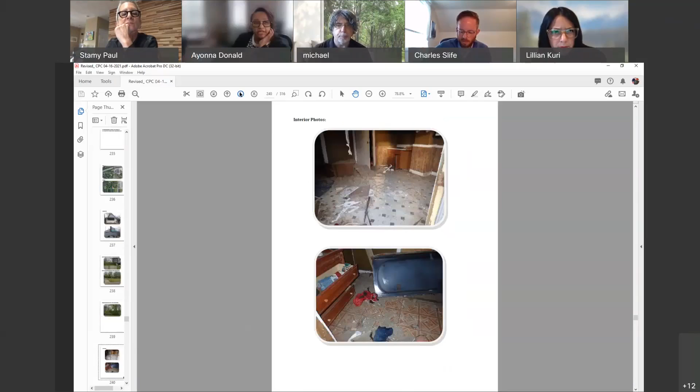We are now looking at 7315 Grand Avenue, and then there's one after that as well, which is the parcel with no address. Are these by the police station, or can August come back? These are all part of that same project. Okay, so then my motion is for 7315.

We have a motion for 7315, do we have a second? Second, Paul. A motion and a second. Let's take the roll. Bowen, yes. Kuri, yes. Paul, yes. Slife, yes. Okay, motion carries. So we have one more that you say is unnumbered.

Is this parcel number 124-24-056? Okay, and this is a different building, we didn't look at this. This looks like a little bit of an industrial building. That is, yeah, correct, it's like a commercial building, yes. Okay, and we'll be razing that structure and clearing all of the hard surface.

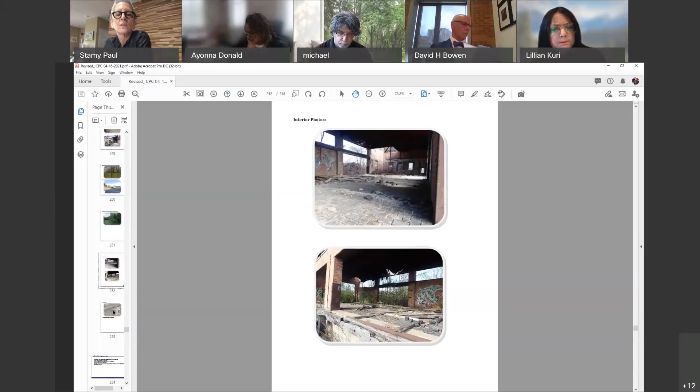Okay, can I have a motion? Move approval. Have a motion? Second. A second. Motion and a second. Can we take the roll? Bowen, yes. Kuri, yes. Paul, yes. Slife, yes. Motion carries. I think that's it.

So I think the meeting is adjourned. Thanks for coming back, David. Oh, sure. Do we have a director's report?

Yes, real quick. There are two special meetings that we're going to need to identify dates for. One is for the Vision for the Valley Plan adoption. We did go over to Alley Cat to check out the facilities there. Our technical staff, Maurice Ruelens, myself, and a few others, we think that the location could work out very well for what we're doing. We just need confirmation on the number of attendees to make sure that we're meeting COVID protocols, and we will be ready to proceed from there.

We did reach out to each planning commission member to ascertain their comfort level with doing an on-site meeting. Last night, there was a hybrid community meeting that was held where Maurice kind of utilized that meeting as a test case, so we're just working out those final technical items. We'll be ready to go forward with that meeting for Vision for the Valley at Alley Cat, and David will need to work out the actual special meeting date. We're not going to hold it on a normal planning commission meeting Friday.